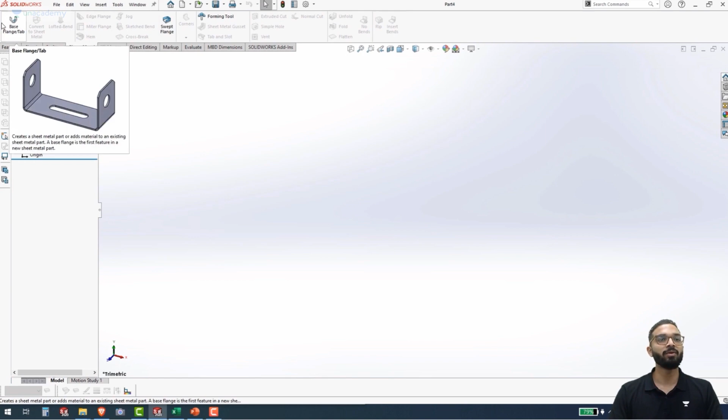We have the Sheet Metal toolbar, which houses the specific sheet metal tools and features that you can use to create a sheet metal component very efficiently. Next we have the Weldments tab, which similarly houses all the weldment features and so on.

Once you have been introduced to these toolbars, now we will move to this section of the screen. Here you can see we are in the first tab that says Feature Manager Tree. If I move my cursor over here, you can see it shows the name for the tab that says Feature Manager Tree.

In the Feature Manager Tree, we have several things like the sketch planes. We have 3 sketch planes in SOLIDWORKS, namely front plane, top plane, and right plane. We can use these planes in order to create our sketches. You can use these planes as canvases to create your sketches.

Next we have the origin. All these planes and origins are called reference geometries. You can use these references to create your sketches.

This is called the Feature Manager Tree because when you create several features for the part, the features will be added one by one under this origin. From here you can manage all your features.

Next we have the Property Manager, which as the name says, helps you manage all the properties. All the parameters regarding that property would be shown over here.

Next we have the Configuration Manager, wherein all the configurations that you create of the part would be shown. Configurations are nothing but iterations or variations of the same model.

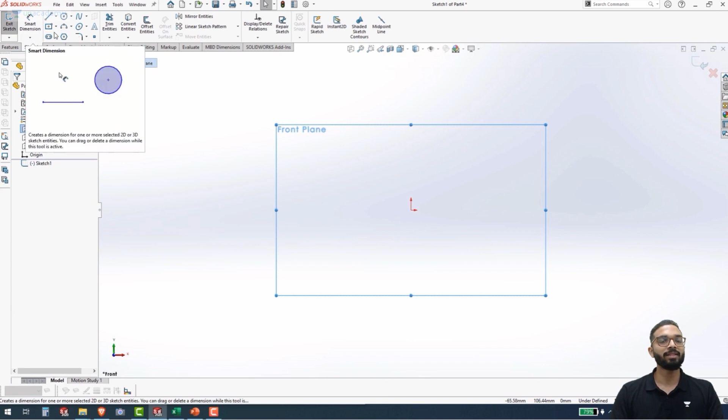If you want to exit the sketch, you can simply press Exit Sketch and get back to your normal mode, or rather the graphical area.

Let's now learn about customizing these toolbars. If I go to the sketch mode, you can see that here we have several sketch tools and sketch entities, but these are not all of them.

In order to access this, you can go to Tools, and from here you can select Sketch Tools. You can see this is the list of all the sketch tools that you can use. But it would be difficult for you to go to Tools, then Sketch Tools, then access these tools.

For that, what you can do here is right click over here on the toolbar. You'd go to Customize and go to Commands. Let's say now we go to the sketch commands, and you can choose from all the sketch commands you want. If you want to add any of these, you can simply select any of the sketch commands.

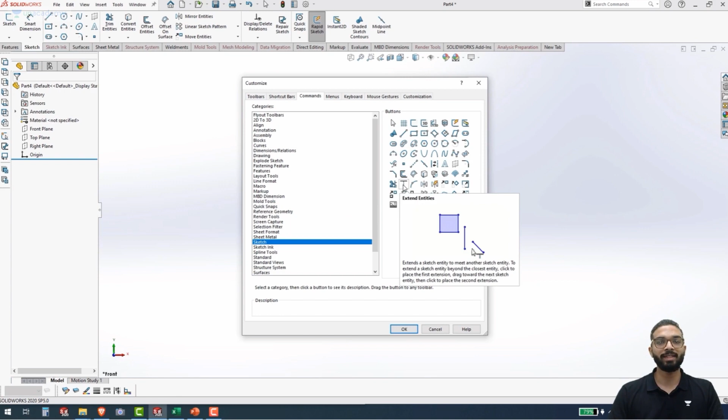Let's say we select this sketch command that says extend entities. I will click on it, select it, and simply drag and drop it over here. You can see this is how we have added a tool to our toolbar. You can add any sorts of commands here to customize your toolbar. I will click OK, and this is how you have customized your toolbar.

Now I will explain the mouse wheel and how you can use the mouse gestures. Here on the screen, if I press the right mouse button and move it around slightly, you can see it is showing me several options like this. In the part mode, you can see these are all related to the views.

If I move this over here, let's say for example, I will first unhide these planes. For that, I will click on any of the planes and then click on this eye that says show. I will do this for all three, and now you can see that they are all being shown.

Let's say if I right click my mouse button again and move it slightly until this wheel is shown, you can see it is showing me several views. For example, if I move my cursor upwards, it will take me to the top view, which was shown there in the mouse circle by the icon.

If I again turn it on, you can see that this option says isometric view. This will set it into the isometric view.

In order to aid your views, we have this triad over here, which shows all the axes which your part would be following. The Y is shown in green, X is shown in red, and Z is shown in dark blue.

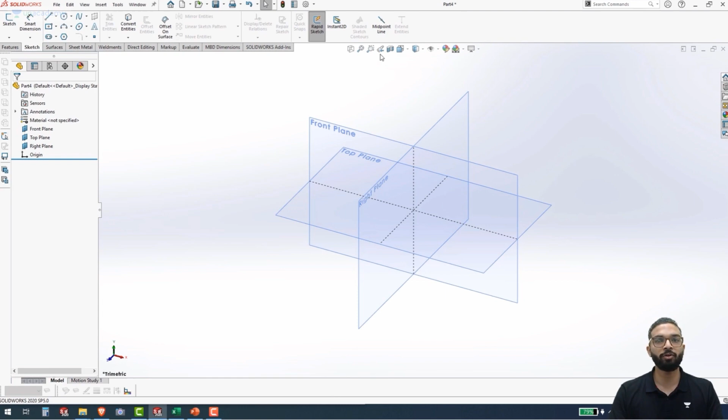For example, I have added this tab over here which helps me operate the view orientation, or set the view orientation according to the way I want it. You can see if I have clicked on this icon over here, it is showing me a cube, and whichever side I select, it will set the view according to that plane.

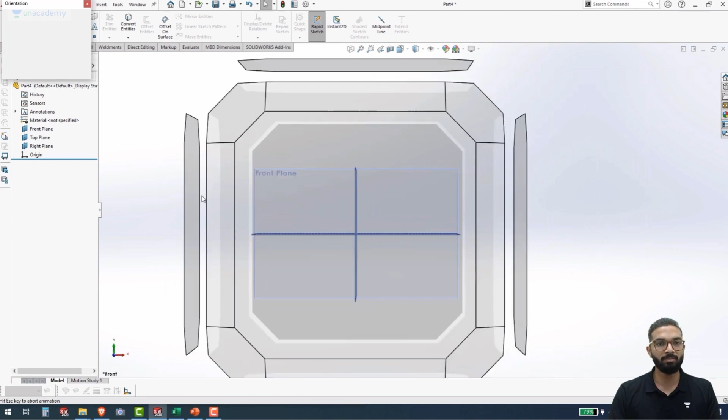Similar can be done by pressing the spacebar. If you press the spacebar, this cube would again be activated and I can select any face of the cube from which I want to take a look at my 3D model.

You can also customize this toolbar in the same way. You can right click on it, go to Customize, and from the commands over here, you can drag and drop any command you want. Let's say I want this assembly command. From here, I will move it and drag and drop it over here. This is how easily you can customize your heads up toolbar.

I will click OK, and now once we are back into this mode, I will show you these features over here. Here you can see we have the Open feature, in order to open any part you want, and we have the Save feature. If I go to the drop down of Save, you can see we have three options: Save, Save As, and Publish to eDrawings. Save will simply save the part, Save As will save it with the name you want, and you can also alter the document format.

If I move my cursor over this icon, it will show me the location at which this part has been saved. Let me save it. I will click on save, and save it over here. Now if I move my cursor over it, you can see it is showing me the location wherein it has been saved. This is how you can find out the location of the part you're working with.

These are handy things that you need to know. Now let's move to the task pane. You can see these are in the home part of the task pane, or rather SolidWorks resources. These are resources provided by SolidWorks, and you can access them from here directly.

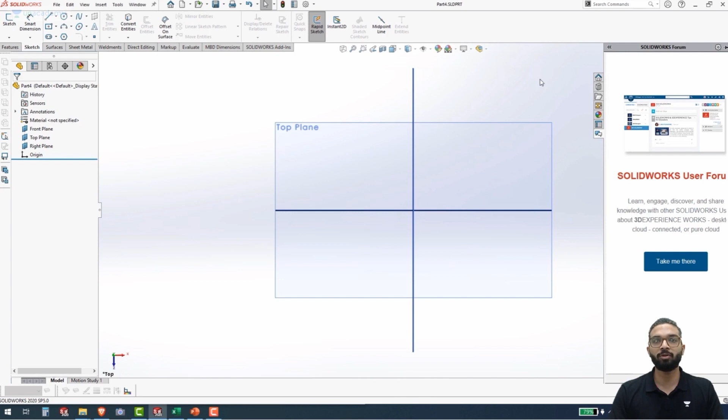Next we have the appearance tab in the task pane. This helps you set your appearance the way you want it. Next we have the custom properties tab. These are the custom properties I created previously, so they are being shown over here. Now this is the SolidWorks forum, which you can access from here. This was it for the task pane.

Now let's say you've learned how to add tools to this toolbar and also this heads-up toolbar. But what if you wanted to add an extra tab? For that, you simply right click on any of these tabs or this space over here. Click on tabs, and it will show you what tabs have been added.

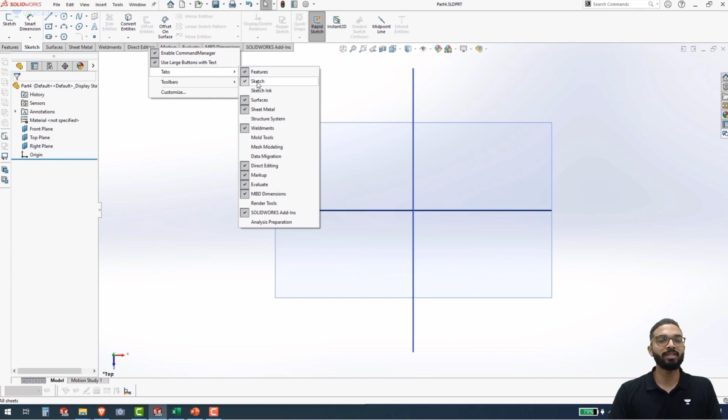Let's say if I want to remove the sketch tab, I will simply click on sketch over here, and you can see the sketch tab has been removed. In order to add it again, I will right click, go to tabs, and select sketch. Once selected and ticked, you can see the sketch tab has been added over here.

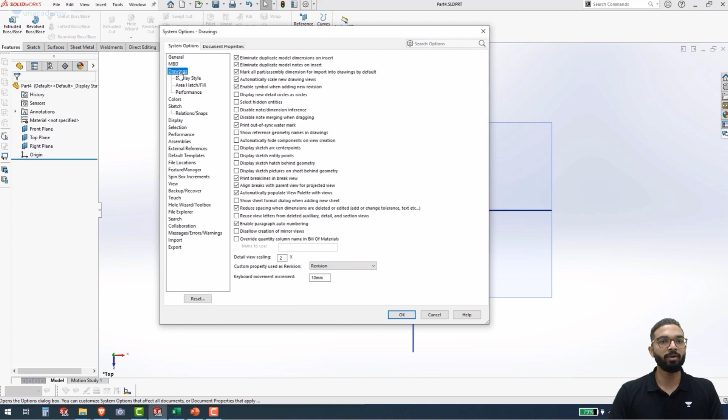You can also change some settings for this part document. For that, click on options, and it will take you to the settings for this document. Here in the system options, you can see we can edit settings for options like drawings. You can read through this and customize your drawing format accordingly. If you want to go to display, you can change your display settings.

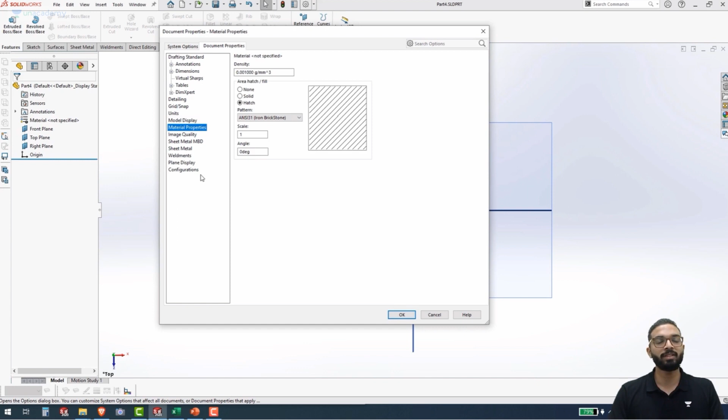Let's say you want to specify your document properties, such as how your annotations should be, or your units—you can change them from here. You can go to model display, how you want the models to be displayed, material properties, and so on. This is how you access the settings tab for document properties. I will click OK and exit the settings tab.

This was a quick introduction to the user interface of SolidWorks and where we can find all the tabs or tools that we require. I hope you understood how to open or create a new part, and how to access all the tools that we want.

Another way of accessing the tools is by simply searching for it. You can click on search command, type in your tool, and search for it directly.